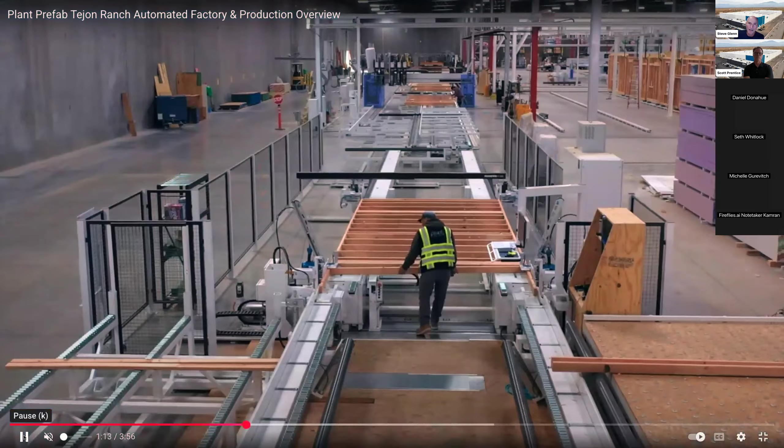Here's one for this affordable housing project we're doing. We're fully coordinating the structural, mechanical, electrical, plumbing, so we can clarify any coordination issues at that point instead of during construction, which is often where you get change orders and schedule delays. We get an absolutely precise bill of materials, so we know exactly what we need to order, which reduces material waste and cost. And lastly, embedded in the model is the machine code that tells our automated equipment what to do. So we're going to now go through that automation.

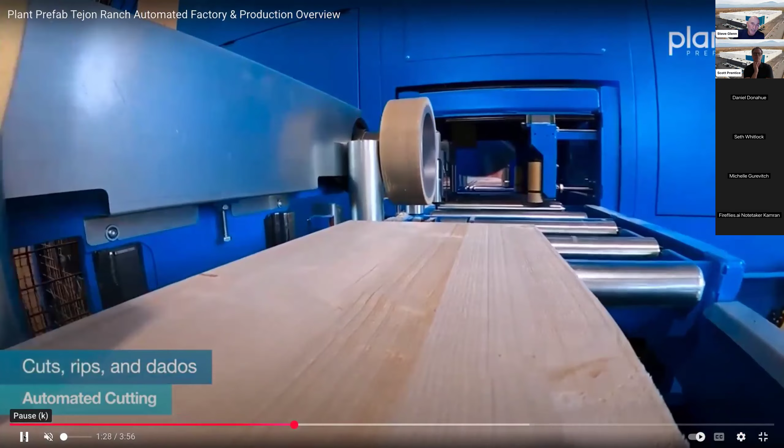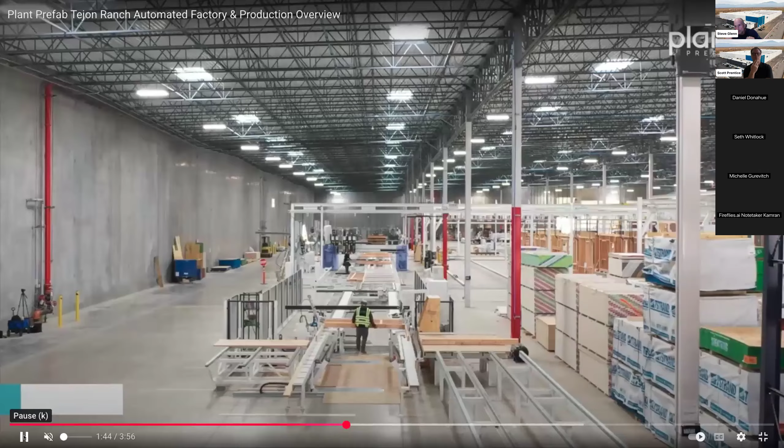Every project starts here. This is a piece of equipment that cuts every piece of wood we use, every stud, joist, rim joist, and not only cuts it, but does any complex cuts and dados that may be required, and all holes or routing. So no electrician or plumber measures anything. Gravity drops for plumbing, it's all done here. Every piece of wood is automatically labeled. We know what project, we know what part of the project.

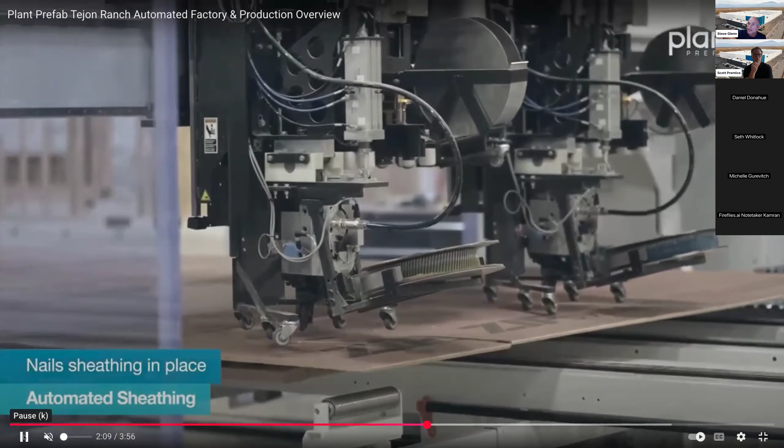We then have three panel lines, and we do both panels and mods. We're the only facility that does that. I'll explain later what that means, but this is our wall panel line. So you just saw a piece of equipment that nails every stud and joist together. This then automatically nails the OSB and the weather wrap. It cuts out openings for windows and doors. And because it's built with automation, it's not only faster and more cost efficient, but super accurate. Every panel is absolutely level, straight, square, flush.

This piece of equipment blows in insulation. It's 100% recycled cellulose, by the way, newsprint. Our tolerances are 1/32 inch, which is like aerospace level, so you get really well-built structures. These are our panel lines where we put in windows, drywall, and final weatherproofing. And then we have three module lines where we put in your millwork, your finished plumbing and electrical, your tiles, paint. All testing is done here, not on site.

The walls ship sealed with certificates, inspection certificates. The local authorities can't go behind walls. It's all done here.

So modules and panels: modules, as you see, are like big Lego pieces. They're volumetric, they have one or more parts of a room. Panels are like a wall or a floor or roof. And as I said, we have the only factory in the US that does both. Every other prefab company picks one or the other, and they both have certain advantages and disadvantages. We can talk about that.

But the point is, we're able to meet projects where they are based on the design. Some are all panel projects, frankly sometimes because that's the only way we can get the components to the site, you can't get a module in. This is a project in West Hollywood. First floor were all panels, second and third floor all modules.

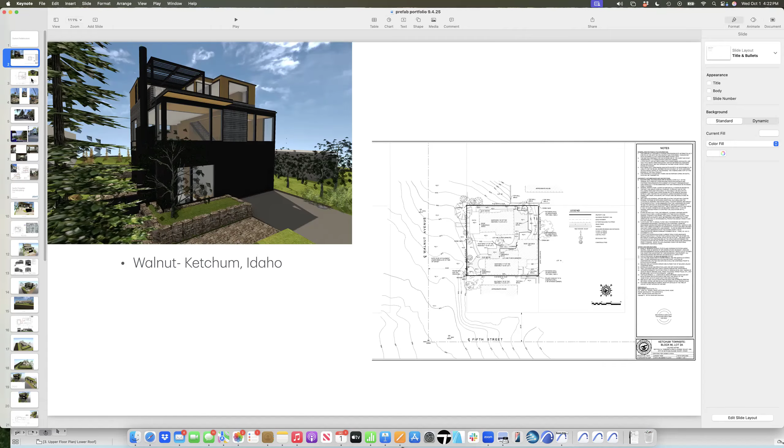All of these prefabrication projects are uniquely challenging in a good way, demanding that the floor plan work well and be highly efficient, just like any project. There's the added aspect that there are a few minor dimensional requirements we have to adhere to.

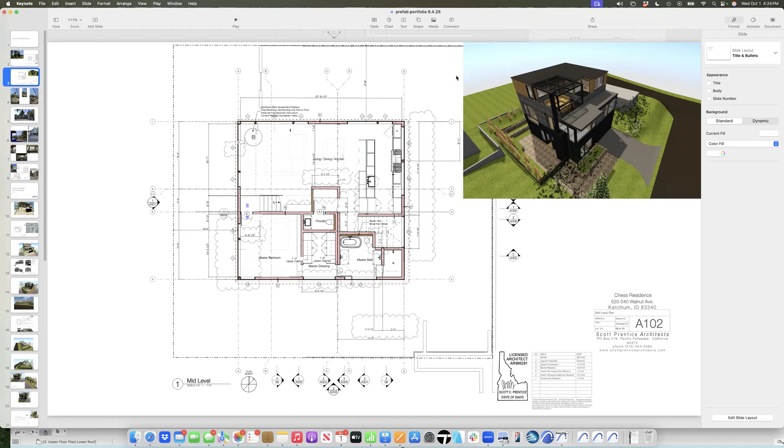This is a project showing the second floor, which is the living level, for this site in downtown Ketchum, on a very small site. Because of the zoning rules, it demanded that we build this structure small and tall, so 3 stories tall, and it captures some amazing views.

What Steve was saying about the panelized wall strategy, working with plant, these could very well also be built in the factory. Our own house is using a combination of mods and panels, and I'll talk a little more about that.

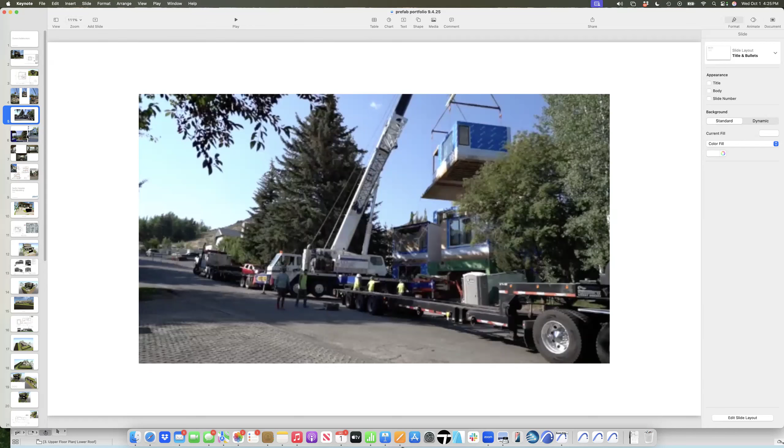You can see here, in the course of one day, this 3-story structure was placed. This shot is at the end of the day, as the 3-story building is in place.

There are lots of different ways to approach prefabrication, where you completely finish as much as you can in the factory, which makes a lot of sense for a lot of projects. We tend to work on projects like this, where most of the interior work is completed, and then we leave work to be done in the field, for different reasons on different projects.

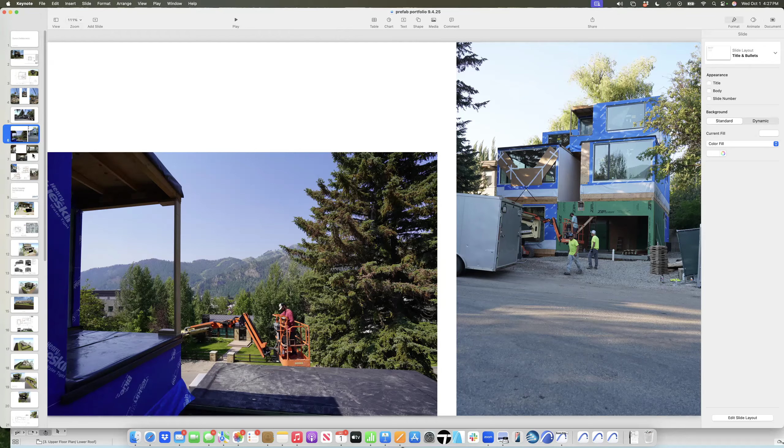I'll talk about those unique opportunities for field work after set in the Palisades.

Here you can see tile is in place. This is actually at set day. There was a plastic wall here for shipping, which was removed, and now this is a large open space. But you can also see the dimensional ability - these are very spacious spaces, with very large windows capturing really incredible views.

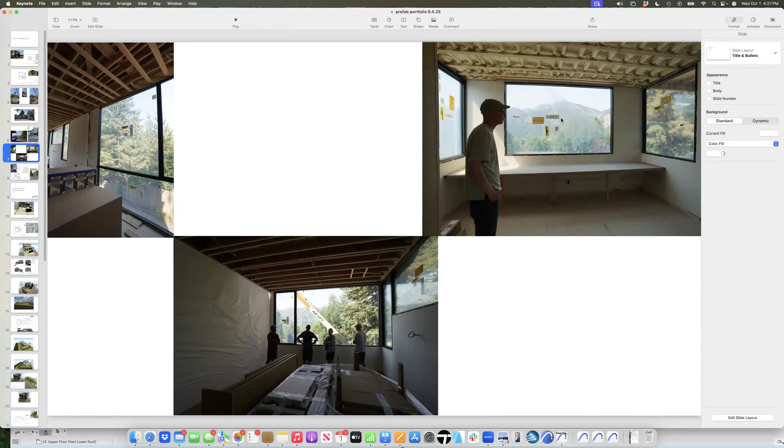So just quickly, showing the project in sequence here and how our process works in terms of drawing. From that, I wanted to pivot to what we're doing in the Palisades.

I am just including a few projects here as a starting off point, I guess.

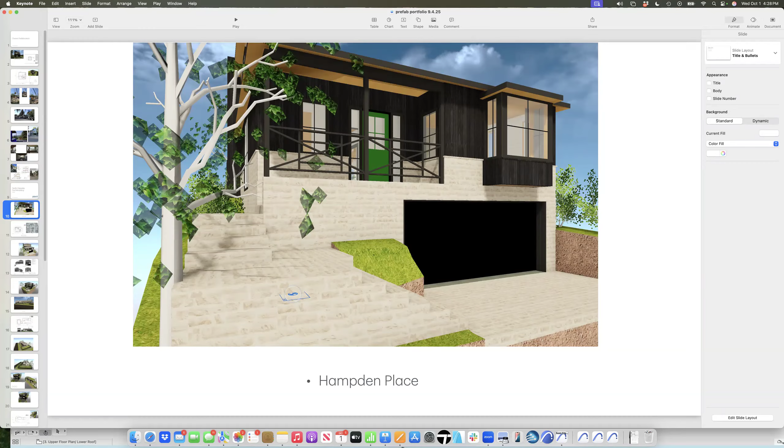This is one of the first projects we started working on. It's on Hampden Place, behind where Village School was—a very small street. Under normal circumstances it would probably be a real challenge to do a prefabrication project there in terms of crane and truck access, but it's working quite well given that we have a lot of room to set things up. We're relying on neighboring lots for access for this. So here is Hampden, and here is this location, and it's a sweet little house.

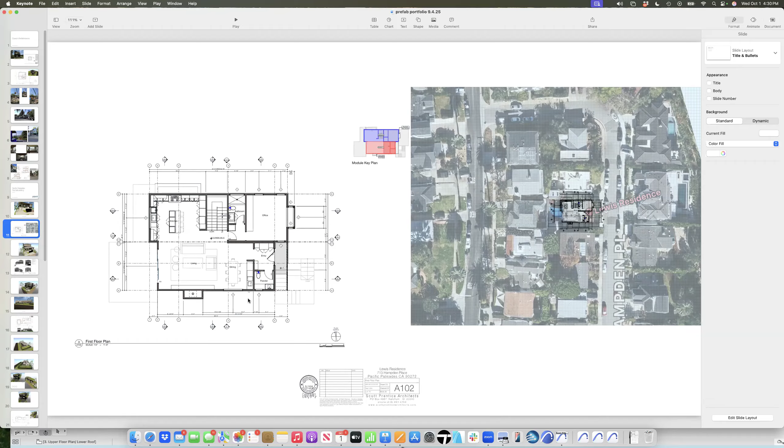But you can see here, this is kind of speaking to that idea of leaving some of that exterior work for the field. They would not be able to use real stone veneer or stone cladding in the factory. So this home uses that as a kind of wainscot material from a wainscot level on that main level down, which I think is this hybrid strategy of being able to bring these prefabricated modules and letting the factory do what they do so well and efficiently, and then also having our local contractors do what they do well, which is cladding these things, bringing that detail and craft to the exterior of the home.

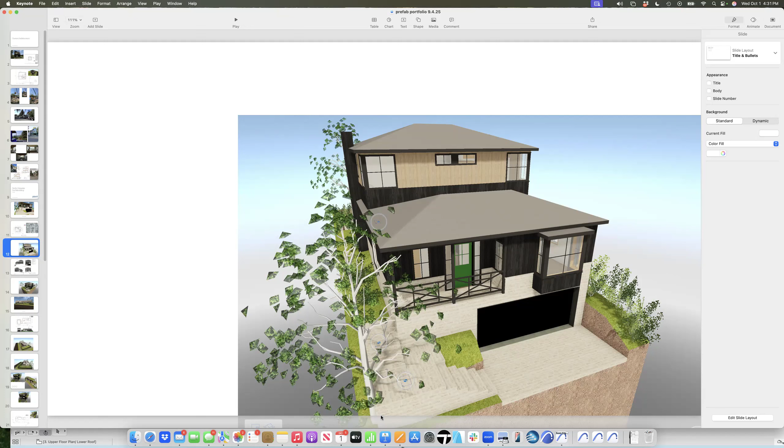And we're big on making sure that these homes don't read as a series of boxes. So you can kind of see how there's a lot of push and pull to the massing that also works really well with the unique zoning constraints in the Palisades, in some areas of the Palisades.

And again, kind of our hallmark are large windows which bring in a lot of light. We like the simplicity of these structures. We like the timelessness and classic nature of them, and the idea that ultimately there's going to be a Palisades context there that we want to be part of.

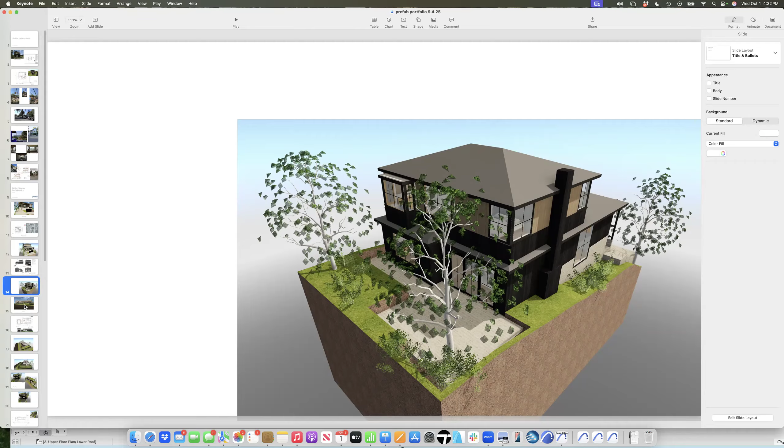And I'll just say we really care about these buildings that we're designing in the Palisades. We care about them as being part of a community. But I would say that they're not about us trying to have a bunch of projects that people say, 'Oh my gosh, those guys did that project.' We're more about being in the trenches with you, getting you a home in the most beautiful and efficient way. So that's really our focus.

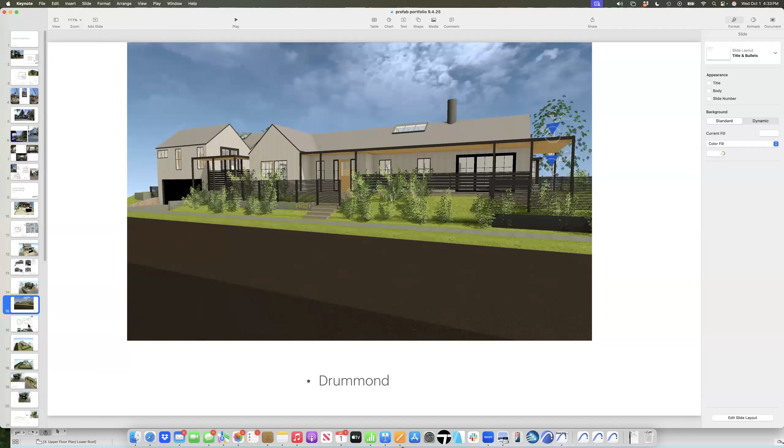This is a corner lot in the ABC streets. That is a single story, single family house with a semi-submerged garage and ADU right at the corner of Drummond and Chautauqua. And once again, just that kind of simple plan that is highly efficient.

It's no slouch of a space, and you can kind of see up above—you won't be able to read this—but as Steve described, it's a series of artfully placed Lego blocks. This one is built in the factory—they're all built in the factory—and this is a mod here. So three mods.

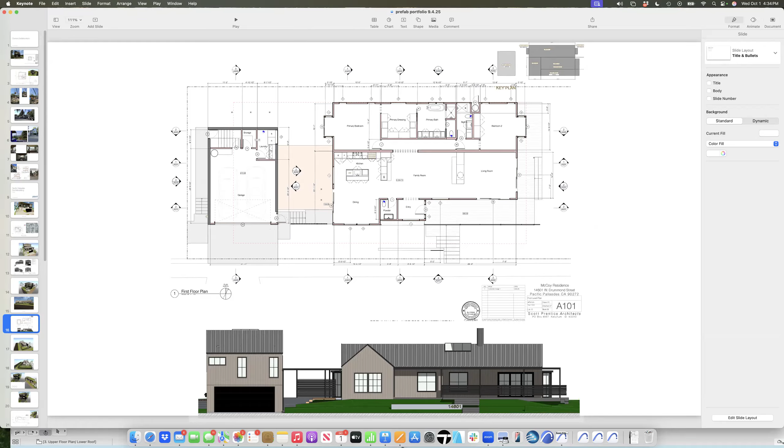A common process for us is how do you sort of break out of that box, and you do it in strategic ways. So we're about to find out whether this is panelized or field built. And then on the ground floor here, there is a semi-submerged basement which has foundation walls, and then the ADU, which is a really nice size space with volume, is built by the factory and goes on top of that. So here's that building that has this wraparound porch and access to the yard here. And they have a nice yard space in the back as well.

This project is quite different than the other two. This is a project on Embury in the ABC streets. What we're finding is that there are people who are kind of all over the place about trying to be in that 110% or below, or even being at that 100%, being at 'I want my house back again,' which I completely understand. Or this one, where we had just finished work on an extensive renovation on this house, a year before the fire.

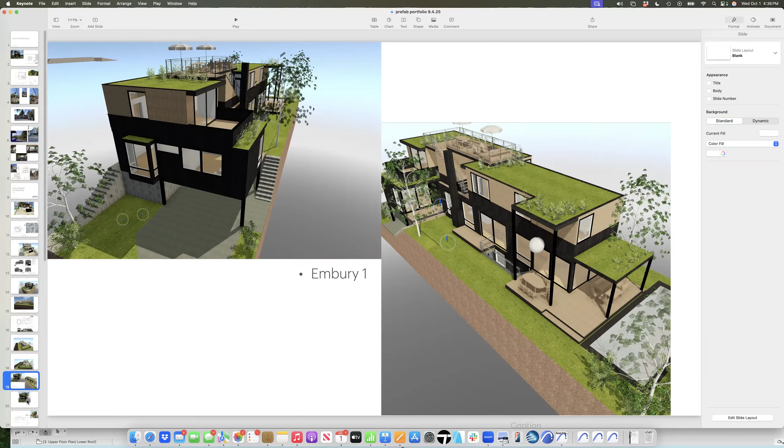So this family said, we have a do-over, let's make lemonade out of lemons. So this has a full basement with two stories of structure that includes green roofs, and we've now added an ADU to this as well. And we're reusing a pool location that they had also finished previously. So this is just kind of an indication of the potential—there's just so much potential for working with prefabrication to make lots of different houses.

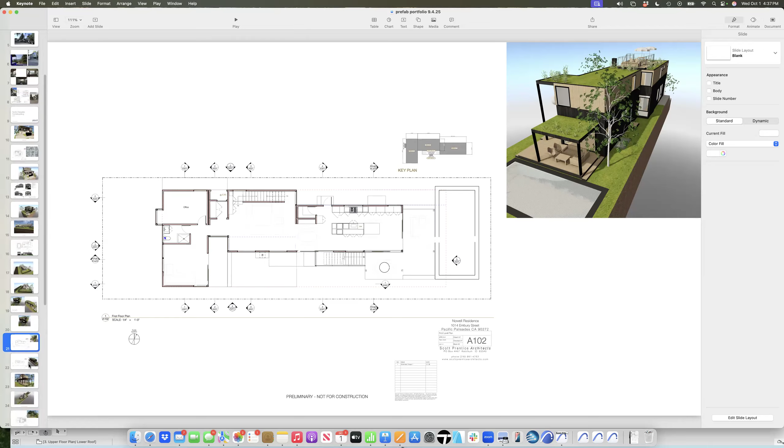And here again, you can kind of see this idea of a series of mods that get put together. This one also includes a good amount of panelized system, and it's extraordinary that Plant has that capability. As Steve said, it really opens up lots of potential options for us. And you can see that again, lots of openness to the yard, where we love the idea of the connection of interior to exterior spaces.

This is a really great project for a really great couple who have two lots that are back to back, from Via de la Paz to Swarthmore, and they were very interested in making sure there was a sense of community, not only within the greater Palisades community that they love, but also within the site itself.

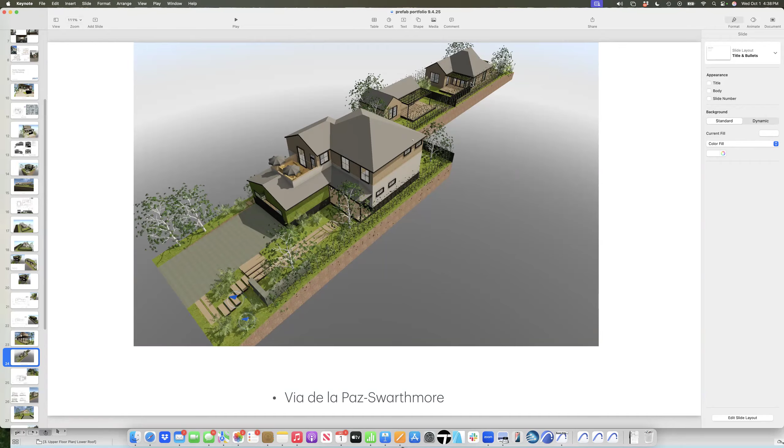So these are three structures that all have a connection with each other. They are separate, but they allow for kind of community connection. And so these backyards, while they're fenced, they're linked with the idea that these are people who like to spend time together, but also have their own homes.

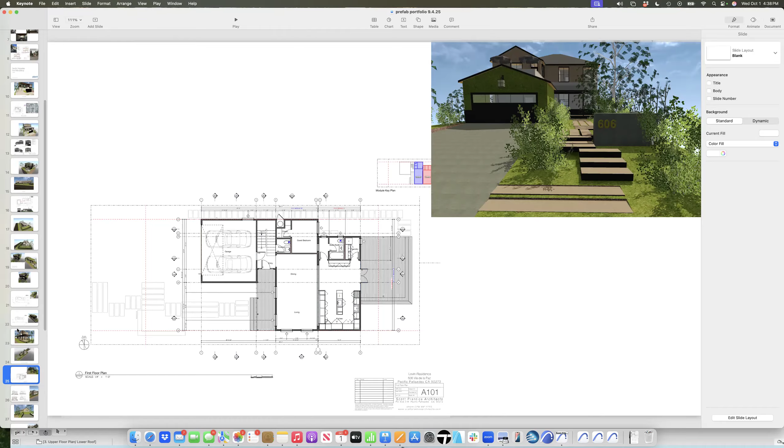So this is a more conventional single family home, 2 stories, on the Via de la Paz side. And you can see that this is a quite different configuration than a lot of the other plans that I've shown. But we really felt no constraint in how you make this kind of building work on this kind of site.

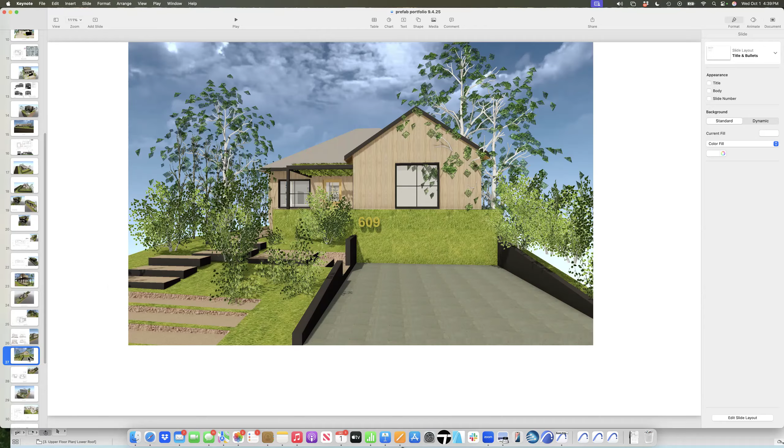And then this is a view of the Swarthmore house. I didn't mention that this is 2 single-family homes with an ADU, a detached ADU in the backyard on the Swarthmore side, and then they are linked in that backyard area. So here, backyard to this side, we are showing them — they are 2 separate projects as far as the building department is concerned. So we're showing them that way.

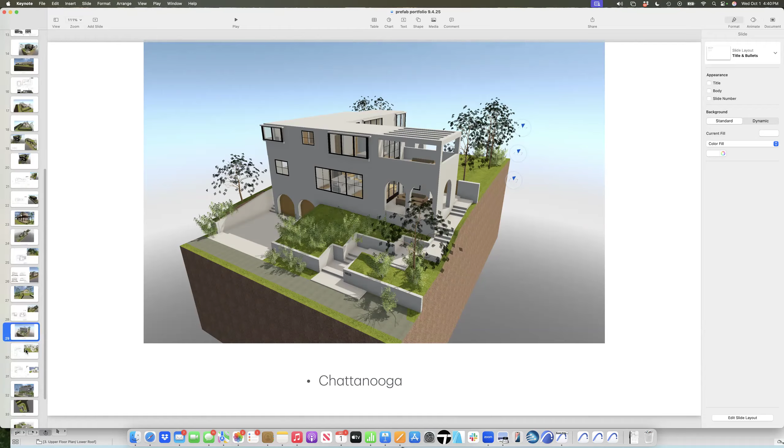This is a project that is on Chattanooga, which is above where Michelle and Susan are, and right above us as well. This is an all plaster house that is just looking at kind of a different aesthetic, and that is also, I think, highly appropriate for the Palisades. And I hope what you see from these images is that the potential for design of these structures, I would say, is unlimited.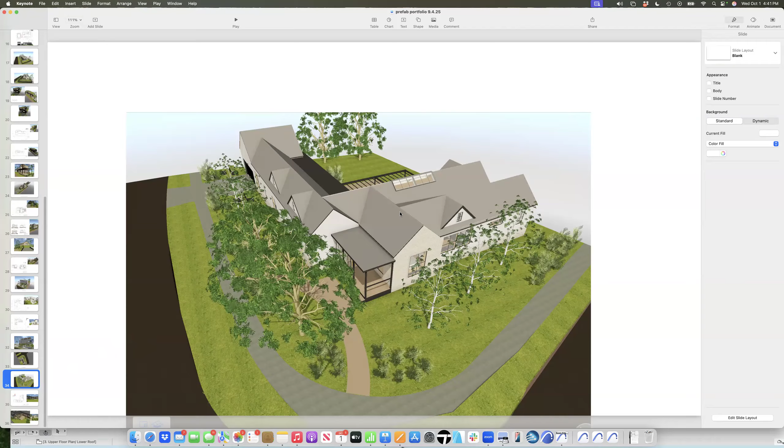Another beautiful corner lot, using stone, and they're very interested in the connection of the house to the garden. They have a site that allows for that, and you can kind of see how these series of mods are placed. And then there is a garage here that is either site built or panelized.

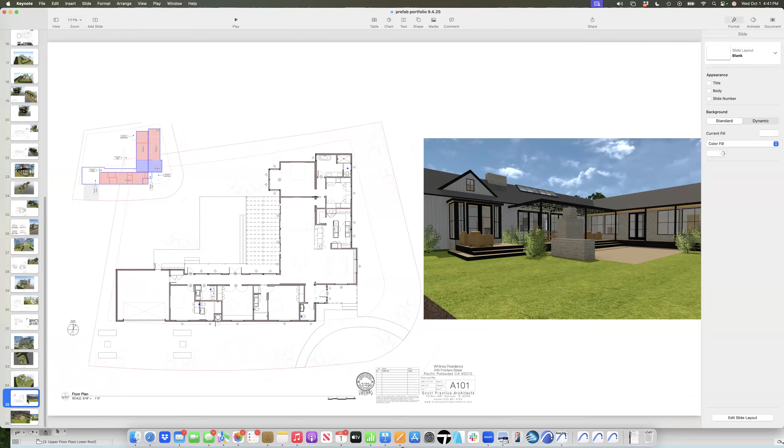And that's it. I am happy to answer any questions if anybody has any.

Let me just jump in and say thank you, Scott, really appreciate that. Some quick questions we inevitably get: cost. I think, as Scott can confirm, for most of the projects we're doing together, the total cost includes soft costs — architecture fees, you don't have permit costs if it's a rebuild project, consultants — and hard costs, which is most of your budget. That's the actual construction, what happens on site, what happens in our factory.

I think Scott mentioned last time budget construction costs are ranging from 600 to 800 dollars a square foot. Is that still right, Scott? Yes. Mm-hmm.

Time frame — our part in the factory, average 2,500 to 3,000 square foot home, takes 3 months to build, about a month before to procure the materials. By the way, that's in parallel to the site work. So the schedules I've seen, and again Scott can opine, are talking 9 to 12 months from start of construction to completion. Does that comport with what you're hearing?

Yes, yeah, and we're still operating under those assumptions. In the early days, the biggest unknown we had was how long it's going to take to clear sites. Now we know what that is. Our second unknown was how long it's going to take to get through the plan check process.